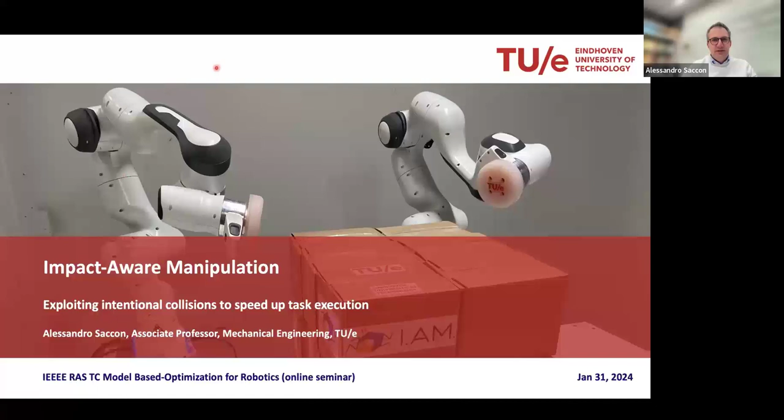Yeah, indeed. So the talk will be on impact-aware manipulation, and we'll tell in a second what I mean with this. Let's see if I can go. Yeah, a bit of introduction.

Where are we, or where am I? So we are in Europe, north of Europe, in the Netherlands, in Eindhoven, which is in the south. You probably heard about Amsterdam, Rotterdam, and this is pretty known. Eindhoven is in the south, and is the hometown of Philips, originally, an international company that you probably heard of. That also started the whole university back like 50 years ago, and then out of this a whole group of companies and also other activities spun out.

So a few companies that you might have heard about are ASML and NXP, and this is all essentially high-tech mechatronic industry. But then there's also quite some automotive activity with trucks and stuff, and also logistics, with a big company, Vanderlande, that is doing, for example, automation in airports, or parcel and warehousing. So we are collaborating with all this area, and the area around here is also called the Brainport. So if you're curious, you can also double check.

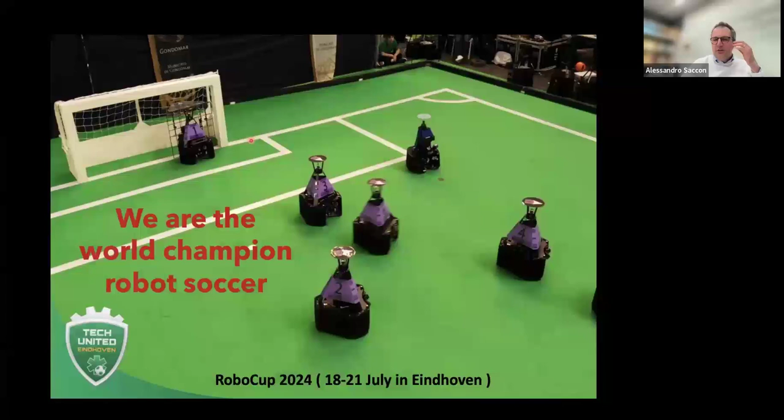So what are we doing here at the TUE in terms of robotics? You probably know that we are also on soccer competition, so we have activities on RoboCup. RoboCup will also be organized here in Eindhoven this year. There's a lot of my colleagues working on multi-robot collaboration and on strategy. How do you make a system also collaborate with humans? There will be, I think, the first match with humans this year.

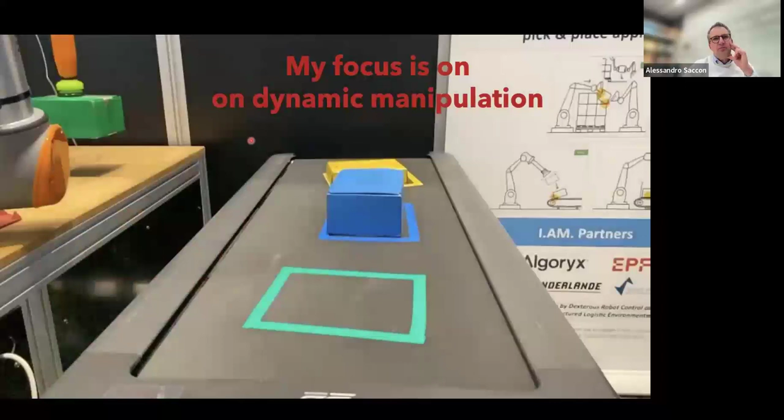But my focus here at the TUE is really on dynamic manipulation, and the idea is how we can actually exploit collisions, intentional collisions, to make things happen faster, or do things that are not otherwise possible, like in this case reaching a certain destination that is out of reach, out of the workspace of the robot. This is a demonstration that we did of the type of technology we are developing for a case of robot tossing, and this idea of speeding up the process. I will say a little bit more later about this.

Let me see if I can click.

Okay, a bit of my journey, a bit of background of myself. I'm actually Italian. I studied in Padua in the northeast of Italy. I'm a computer engineer by background. I did a PhD in system and control. I was actually back then working on virtual motorcycle riding.

There was a company, Ducati Corsa, that was trying to get simulators or lap time simulators to understand how to better predict the behavior. So then I essentially moved from system control and computer engineering background to more mechanics, I would say. And then we had collaboration with companies that are producing things like Adams, a multi-body simulator.

And in this period, I spent quite some time also in the US, about 1 year, mostly working on numerical optimization, nonlinear control, maneuver regulation, path following. And through this journey, I worked a bit in Ducati Corsa in collaboration, developing tools for racing motorcycles. But at a certain point, I said, okay, I actually prefer staying in academia, and then I started going a bit around.

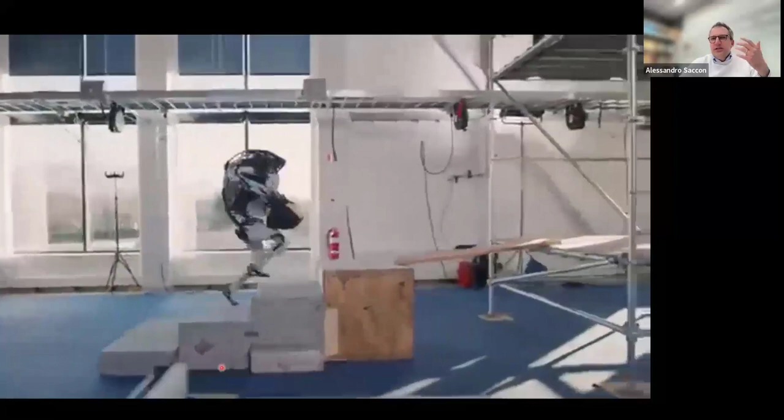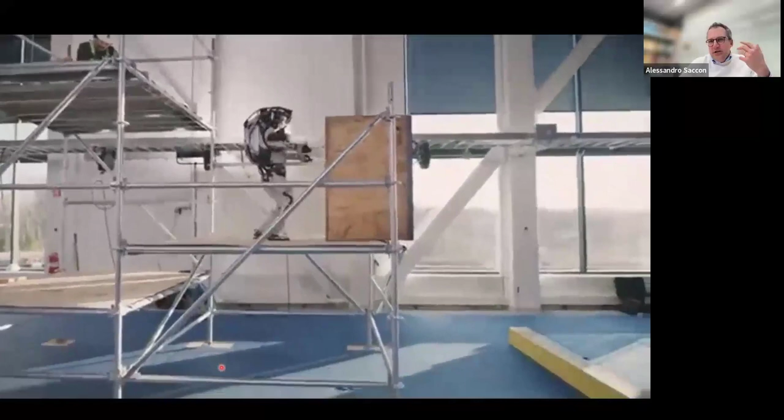And there's a lot of research that has been done on locomotion, both for bipedal and quadrupeds. My interest is looking more at the manipulation part, because there are not only gaits, there are other things that are interesting. So that's the motivation. Hardware is getting ready, and how can we make this a common technology that is available? You can probably see that there's a rise of commercially available dual arm manipulators out there.

So half humanoids, just arms with torso, and also full humanoids. Last year was just incredible, right? For humanoids, you have this Optimus, 4NE-1, a Figure, Phoenix, and way more. And I just put there a few, and you see the different type of robots that are compliant with backdrivable joints, and they are really meant to physically interact with the environment. So there's maybe a little bit of a hype in the expectation that these robots will be able to do everything like we do in a few years. I don't know if that will be true, so we'll see how it will evolve. Anyways, it's a very exciting period in time, where incredible hardware is getting available even at commercial level, not just in research centers. And there's all kind of things happening also for perception to really understand where objects are in the world.

So then the question is how can we perform this action again at regular speeds. But then for me, it's also interesting, okay, how can we speed it up? How can we really bump into things on purpose? And how can we then still make these motions somehow robust? Because you can have a plan, but of course it will never go as expected, especially if you have impacts. So what to do in that case?

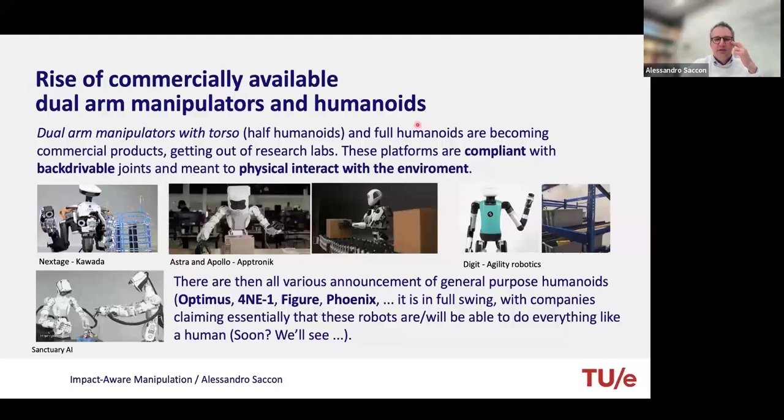Good. So impact-aware robotics - we, like I said, as humans, are capable of dynamically interacting with the environment, with objects, with the ground, with all the walls around us. We do it every day when we run or jump, for locomotion, but also when we grab and toss objects for manipulation. And robots are not yet, but they are definitely catching up, in the sense that people are developing better and better hardware every year.

So then there's essentially this emerging field that is really focused on exploiting contact and also exploiting intentional collision. And so this is what I mean with impact-aware robotics, a term that we sort of coined in the last year. And also there's a special collection, IEEE Transactions on Robotics, with other colleagues in the US and here in Europe. Some papers will come out in the coming months. We had like 40 submissions to this special collection, and we are revising probably 10 papers, or about that number that will make it through.

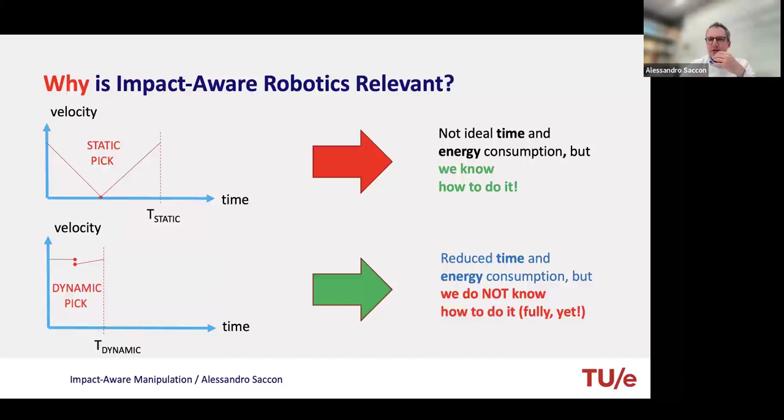This is a simple computation, but the thing is that you don't have to decelerate and accelerate, so this in principle can reduce time. It's true you need the right hardware, so that's something that is still in development. But the other point is, even having the whole hardware, it's not fully clear how to do all those things in a robust way. So this is where we are essentially focusing.

So what are the challenges? So indeed, this is the standard practice, right? Free motion and establishing contact at zero speed. And this is, like I said, a bit limiting and restrictive. And why don't we have the whole, something motion similar to what we do? Well, the point is that you have to rethink many parts in order to be able to do this. From modeling - okay, what kind of models am I going to use for this - from planning, learning.

If you execute certain motion, the learning with impact is different from learning when you assume the transition of zero speed. It's about control and estimation.

So we are essentially missing several things, and there has to be a holistic framework to put it all together. That's the vision I have here, though many other researchers worldwide, with completely different approaches, are also trying to create this type of technology. For me, it's really about showing it on real use cases.

Because of the industry around here, it makes a lot of sense to focus and discuss applications in logistics. But the technology is totally general in principle—it could be applied to all kinds of manipulation, and there's a lot for sure also on locomotion.

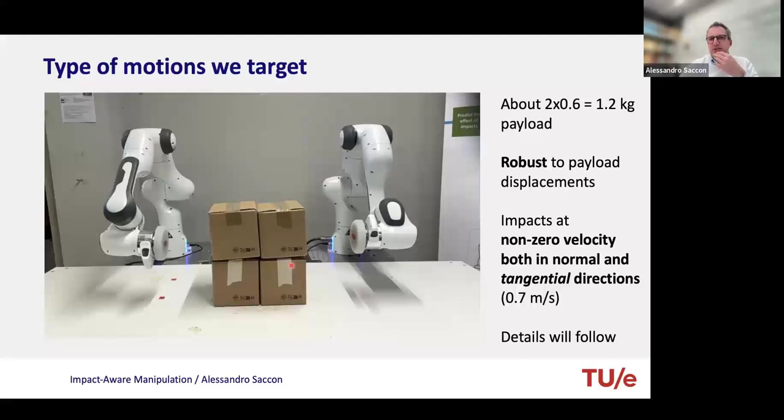I'm going to explain a little bit our way of thinking and the type of research line that we've developed in the last, I would say, 10 years.

So what are the challenges, the missing parts? One thing is relatively important: we are conducting research, but there's plenty of things still to do.

It's really about validating impact models that can predict what happens. If you want to interact dynamically with the environment, you need prior information, for example about the object you're going to lift up. You're not going to lift up a very heavy box without knowing its weight, because the way your body reacts when you lift it really depends on what's inside the box, what the weight is, where the center of mass is, and so on.

So in general, if you have to pick up a lot of objects, maybe the first one you handle carefully—you learn a bit about the dynamics inside, is there something, what is the weight—and then as you learn the objects are always the same, you start getting faster and faster.

This is, by the way, one of the reasons people get injuries, maybe also in logistics centers, because after a while you make assumptions about the weight of objects, but the moment the weight is completely off, you have a real problem—you're prepared to handle an object of a certain mass, but the mass is completely different, and this can create problems, typically on the back.

In any case, we need this type of model in complex scenarios because most impact-aware control is predictive. You should have an idea of what's going to happen, and the controller is built around this feed-forward motion to make sure the control isn't disturbing the natural dynamics of the system. But there's quite a lot still to do on predicting and understanding which models to use, because reality is flexible.

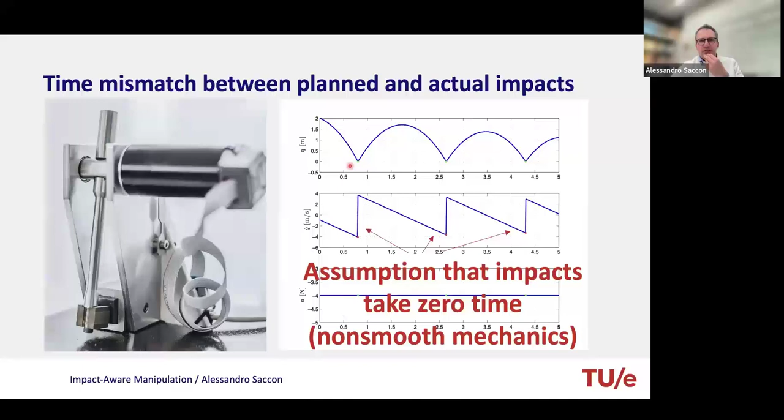But if you are just following the reference given by this blue curve, the reference still needs to have a jump. So the controller is trying again to make the system jump again, right? So you have a really weird behavior like the ones I show here, especially with low gains, where the tracking is extremely poor. Ideally you would like to get something like this: it bounces, and then you start following the new envelope, so on and so forth.

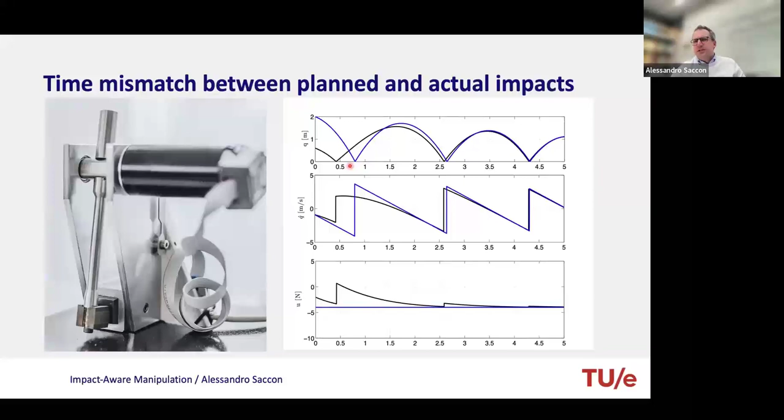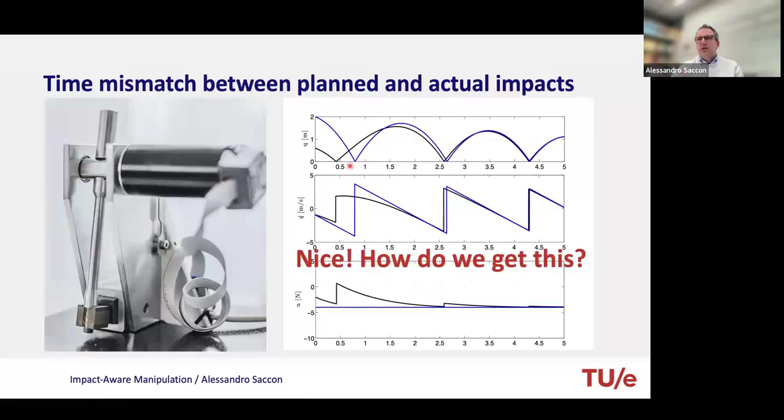This is nice, but how do you get this? Because it's definitely not what you get if you apply a standard tracking controller, which usually is not meant to track trajectories with impacts. So the idea was pretty simple back then, but from this simple idea we proceeded up to the point where we can execute this on a dual arm system and grab boxes with essentially no problem in the last year.

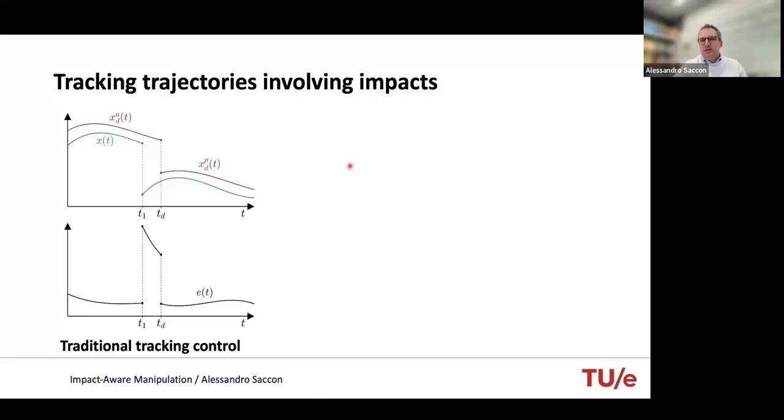And here it shows what the issue is. If you have a reference trajectory, in this case red, and then you have the executed motion, you see that if you take the difference between these two trajectories, you will have this kind of peaking effect, because there is always a time mismatch between the nominal impact time t d and the actual one, t 1.

So the idea we started to pursue is, instead of only having one reference about the nominal impact time, try to have more than one. Like you see in this picture, these things are a little bit extended. How it's extended really depends on the application, but the core idea is that we have more than one reference in a neighborhood of the nominal impact time.

And if you have this notion, then you can define the error based on whether you have experienced the impact or not already. In this case, the error is between these two curves that I'm highlighting, up to the point where an impact is detected. And when an impact is detected, you will start following the other curve and define this as the error, and the result is that you get a completely different type of error definition.

And this simple trick allows you to get this type of behavior that I was showing before, without even changing the gains. So with the same gains and a new error definition, you get this behavior.

So one question is, okay, what do you get, and where are these things coming from? I think it was really coming from the idea of trying to do planning for motions with impacts, and then trying to do sensitivity analysis.

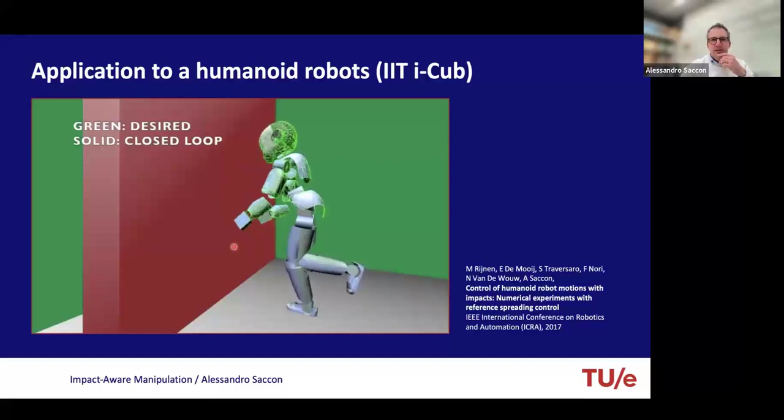And showing that indeed, even if you have a desired motion, in this case green, and the solid one is closed loop, and you start at a different moment, you can really have this convergence even if you have this mismatch. And this was also employing a QP controller for doing the balancing of the robot. So we showed a few years back that this idea could be relatively easily applied to real humanoids and systems.

So then the thesis of my former student finished in 2018, where all these kinds of things are described. And then a few years after that, we got funded from the European Union to continue. So that also involved other colleagues, Aude Billard, Abderrahmane Kheddar, Sami Haddadin, as academics. You probably know them all well.

And some companies active in logistics. And then the company Franka Emika, now Franka Robotics, of course, and then Algoryx, a company doing physics simulation in Sweden, in particular making sure to simulate complex simulations. The project will end in March of this year.

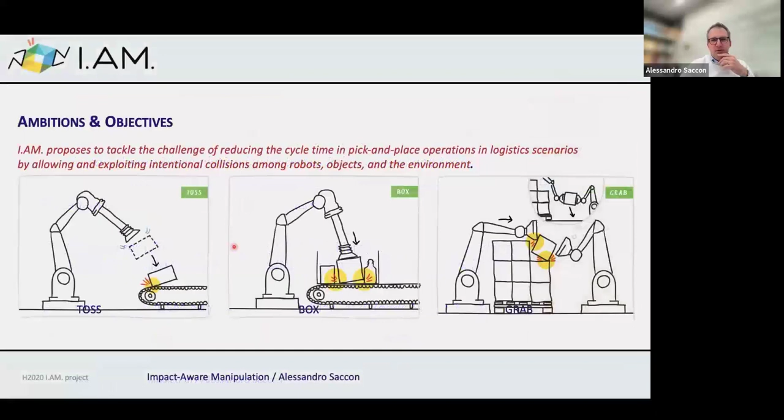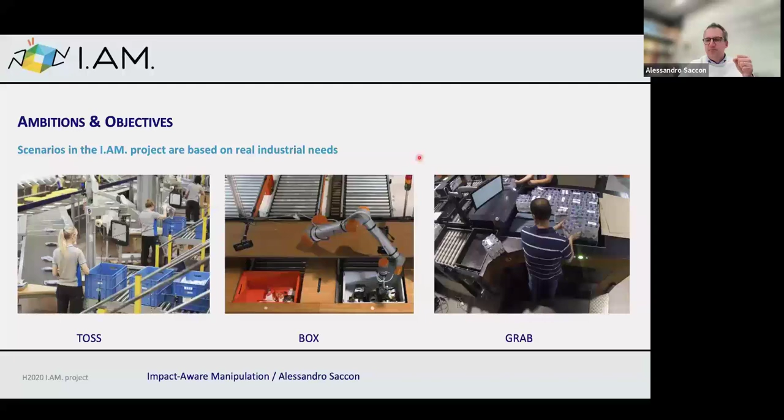And in the project, we are focused on tossing, boxing, and grabbing scenarios, all things that come from real logistics use cases. So people want to speed up this in-feed process, taking objects and putting them on a conveyor. People want to have bin-to-bin motions where you use contact and impacts to speed up the filling and also the filling rate of the totes. And the grabbing scenario is more a dual arm manipulation where you do the palletization.

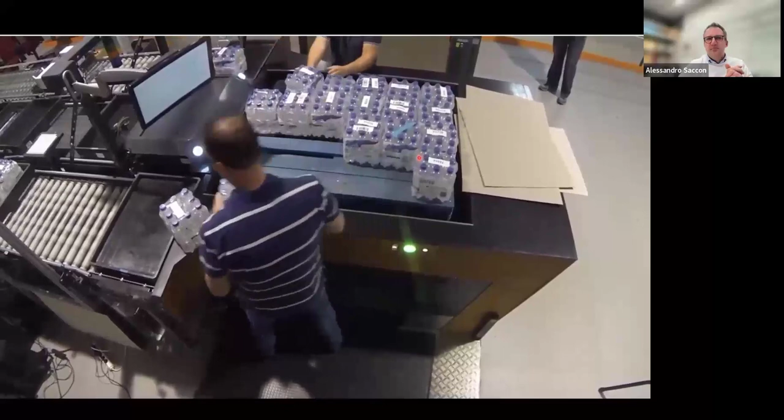We have a lab here where we test especially the first two use cases. I'm not going to discuss this much today for the sake of time, but I will focus more on this dual arm manipulation part. And just the things that we are doing here at TU/e, because the other partners that I mentioned are also doing fantastic work there. So you can check the publications on the website on what they are doing. I'm just representing what we do at TU/e.

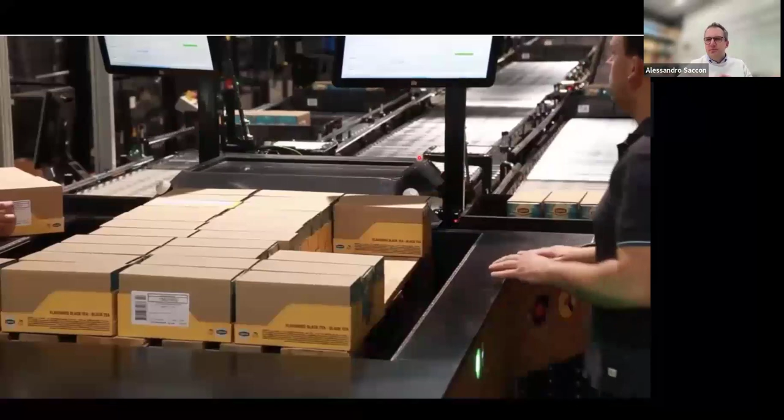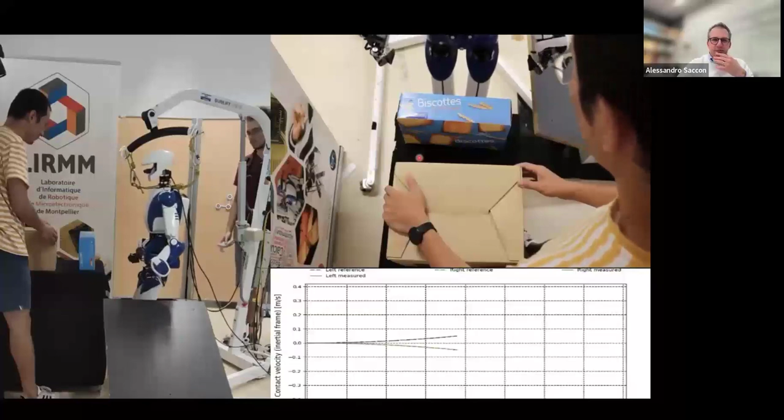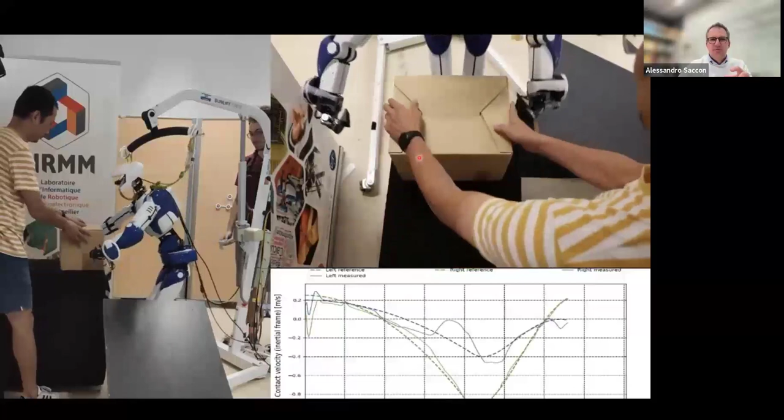This is an example of the type of motion I was telling you about, where people grab and put objects, dual arm grabbing, and you see that the operators will pick up more than one object at the same time, or will make it slide. This is the type of motion we would like to automate. And the group in Montpellier was trying to put their type of control strategy with the QP, also to show a humanoid performing the same motion. This is not really using the things that I'm going to discuss, but it's still interesting to see robots performing this type of motion.

And here at TU/e, I will just show this. There was Automatica, showing this idea, if the animation works, just to show that we can perform even with the dual arm system fairly complicated and interesting motions. And this will be in this case just contact-rich manipulation.

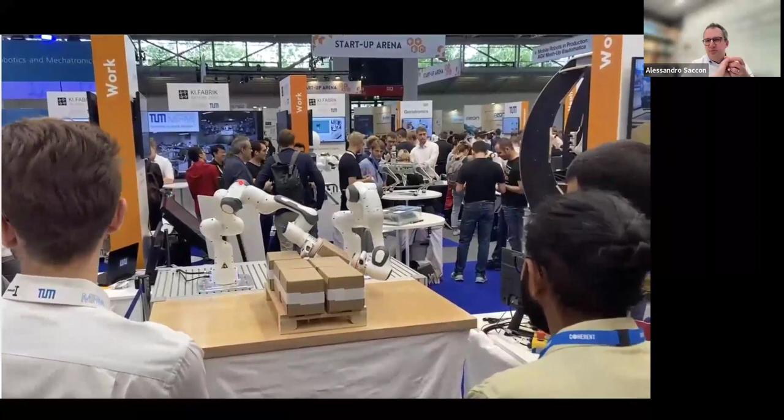But the part that is interesting for this talk is not really this manipulation part. It is really one of the last parts, where you will see that after placing a few boxes on top of each other, you can actually do some flipping and rotating, and then the question is how would you stabilize in general this type of motion. And of course, the reference here is teleoperated. That should not be a surprise for most of you. But the question is, once you have this type of motion, how do you make them robust, how do you stabilize them. And this is what I'm going to discuss in the remaining 15 minutes.

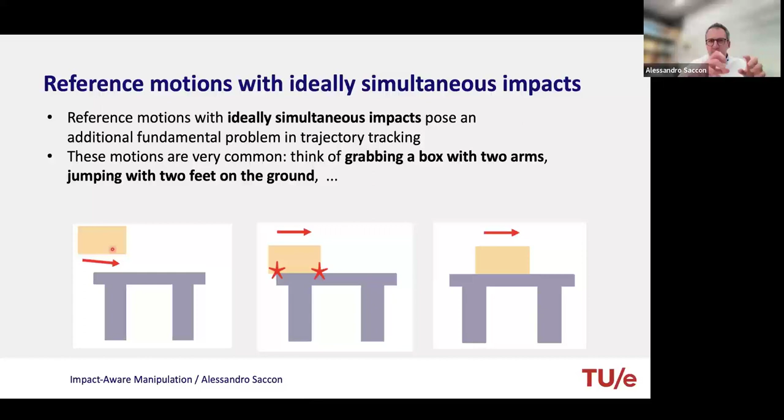So one of the interesting things is that if you want, for example, to have a robot make a box slide on the table very quickly, this is a sort of surface contact. Ideally you think the box will just touch with all corners on the table at the same time and start sliding, so there's only one impact, right? And this type of motion is a bit everywhere, dual arm grabbing. Your intention is always to do this, but this will essentially never happen in practice. So you can have this target, but you want to make sure that even if you have misalignment and therefore a series of spurious impacts, the dynamics is still stabilized.

And the problem is that once you have these spurious impacts, in this case one impact is the nominal one in the simulation, and the other one is the spurious one where you have an initial condition that is not as you wanted, you can have really sudden changes, for example, in the angular velocity. So think about holding a box and making it slide on a table. The reference will say the angular speed of the box is 0 before and should be 0 afterwards. But with these spurious impacts, suddenly the angular velocity can become extremely large.

And the thing is that the dynamics of the system will naturally try to push it back to that level. So if you just use an impedance controller with high gains, this is actually problematic, because you are trying to reduce that speed, but the angular velocity is actually helping to do the stabilization. Okay.

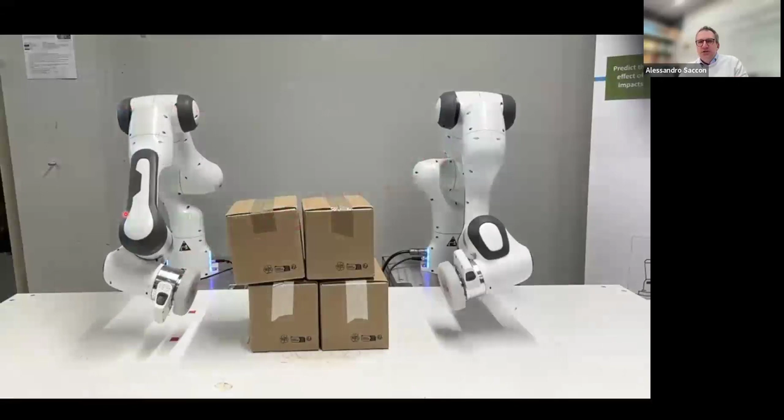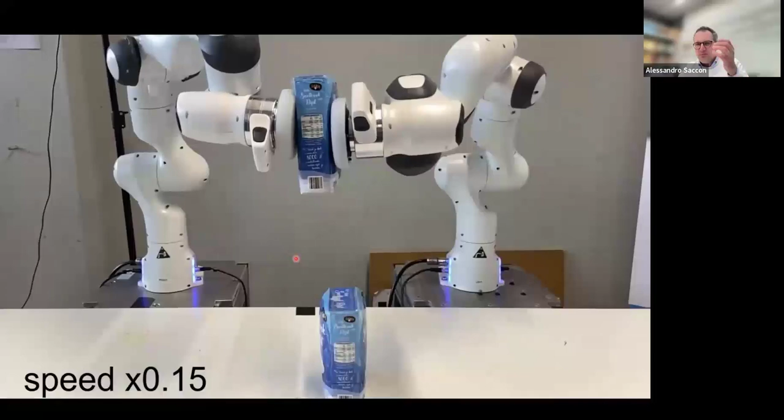So as long as you do not disturb the system in this phase, then essentially you will be able to continue the execution. So that's what we did, and we are demonstrating now on this type of motion that I show you, and the details are in some of the papers that we published, and one paper that is also under review in Transactions on Robotics now, where we also show different type of objects. And here I show you boxes, and in this case a pack of rice. This is about 0.708 meter per second, about a 1 kilo box.

But once you then record the motion of the real robot, then we can essentially create this extension, as I was mentioning before. This is for the position and the velocity and also for the force. And then we have essentially a way to track that motion of the real robot now with high gains without having this issue that I was showing at the beginning when trying to apply a standard trajectory tracking controller. So if you want to have more details, it's really in this paper; there's an online version already available.

But the message here, and I'm just looking at time now, is that we show that by having this new form of controller with this interim mode, which is this proposed approach, essentially we go through this type of impacts you saw, even if you have a mismatch, so you still have impacts before and after, without commanding any big jump in the velocity that you would have, for example, if you would not use this type of strategy with reference spreading, or if you would use the reference spreading approach where you just change the controller only once after an impact occurred.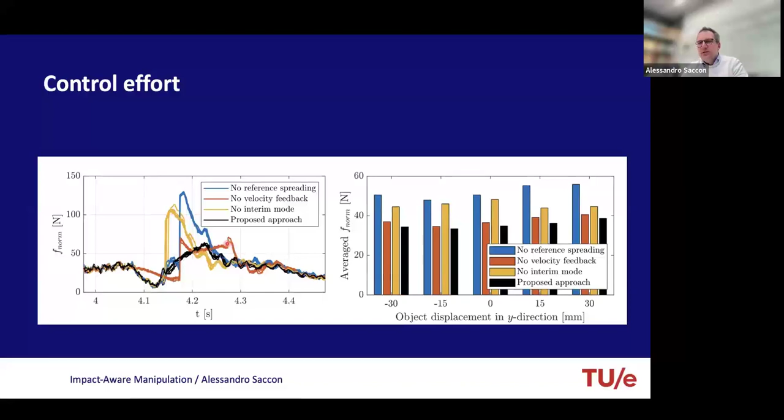We also compare with another approach, which is also sometimes, I think, used in practice: essentially removing the velocity feedback. And we saw that indeed removing the velocity feedback before and after the expected impact is a possibility. But at the same time, we found it extremely not robust, at least for manipulation purposes. So this is the typical plot, and again, I don't have the time to go into the details, so I encourage you to read the paper for more details.

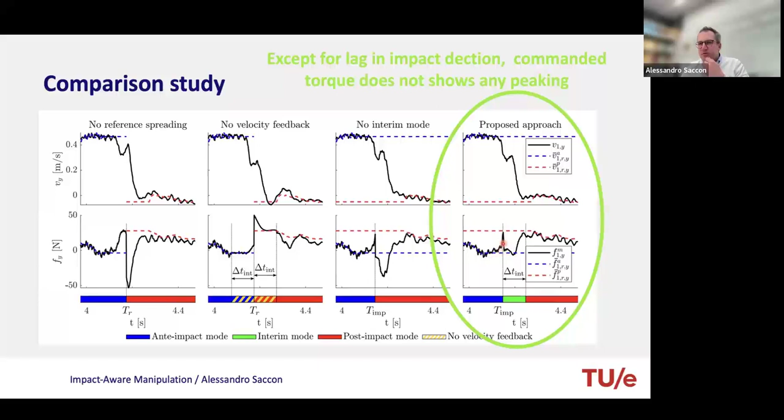But essentially, we saw that in the proposed approach, except for the fact that you have an impact detection phase, where indeed there's a sudden change in the velocity of the system with respect to the reference. Therefore, you have sort of a small spike in the force that you command because there's a large error building up. But after detection of the impact, essentially we have a particular intermediate phase where velocity feedback is disabled, but we still have feedback, and we then transition from the pre-impact trajectory to the post-impact trajectory.

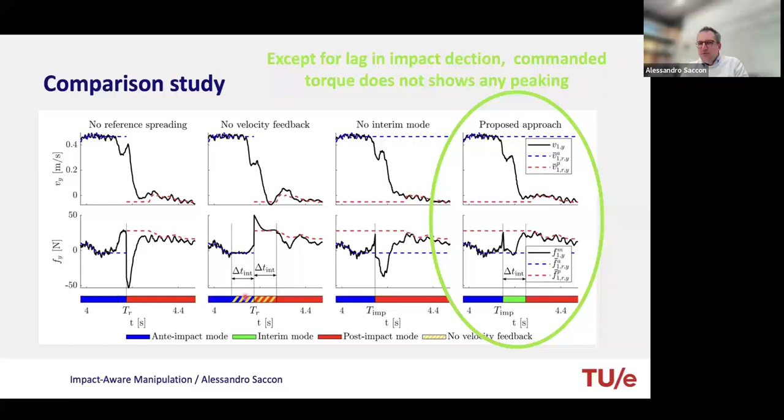And this phase is of limited extent, for example, with respect to one where you would just disable the feedback before and after, without having any triggering. So essentially, in our experience, we can clearly see that there is an advantage of using the strategy we're proposing. We are curious, of course, to interact with other researchers to see their experience in trying to implement the same strategy. But this is more or less what I wanted to say, at least in terms of trajectory tracking.

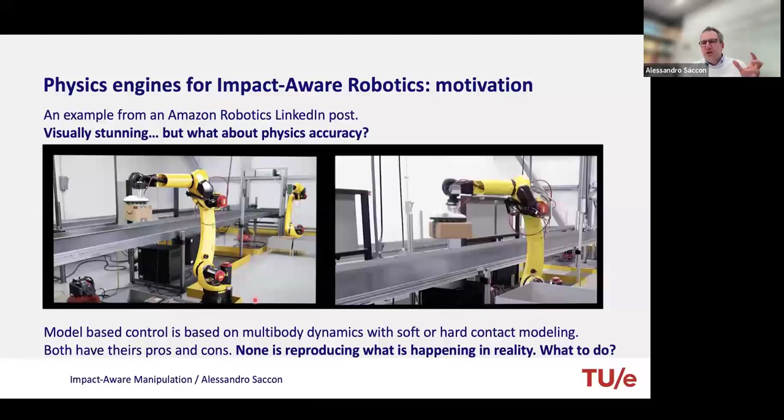And I want to finish the talk here mentioning a bit what we are exploring with post-impact velocity prediction. This is an example from an Amazon Robotics LinkedIn post, which is showing what people sometimes call a virtual replica or digital twin, right? This idea that you have a real robot and one done with computer graphics. They're clearly visually stunning, but when you look at physics interaction and simulation, it's really impossible to reproduce all kinds of oscillations that are happening, plus all kinds of things with the friction and the soft interaction. So the question is, how can we combine the two? What should we use, especially for predicting the behavior of the system?

So we started in 2017 working, in this case a work that I've done with Padois, where we took, for example, this lightweight robot arm from KUKA, right? And we essentially just smashed it against, impacted, a planar vertical surface, and we tried to see: can we still use rigid body models and get an idea where the system velocity will jump depending on the impact configuration and the ante-impact speed? Can we predict the post-impact speed somehow?

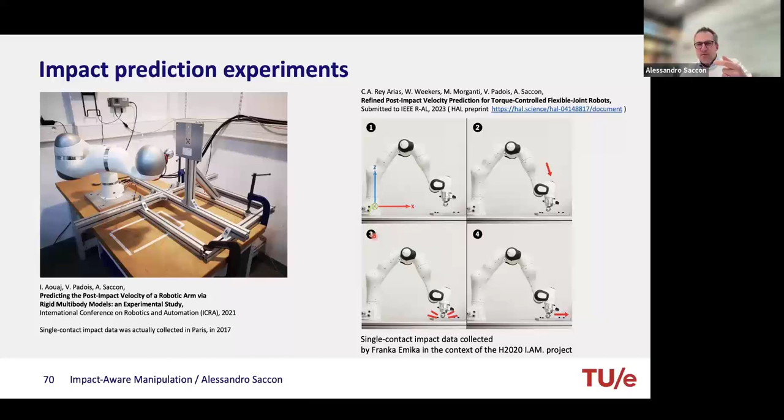We did it with the KUKA paper. We have a paper now under second review at Robotics and Automation Letters with the Franka robots to do similar things with further results. Also, we discovered that we can include certain effects of the motor dynamics and the low-level torque controller to get a good estimation. But what I want to mention in general is that this is a typical way that we think about this problem.

Model A is a robot that has a flexible joint and flexible contact, and you can go to a model where you still have the flexible joint, but the contact becomes non-smooth. So it's just an impact law type of thing, a non-smooth model. And you can further reduce it, where you essentially consider that the transmission between the motor and the joints is rigid, and the contact is also rigid. So this is just a simulation example.

It shows you that essentially these vibrations induced by the softness of the contact and the oscillation due to the link are somehow higher-order dynamics with respect to the rigid robot, that is, model C, as long as you have the right inertia in model C. So this is typically what will happen, and I will show you in a second on another slide where you see these models. We are getting confirmation that we can still use rigid robot models as long as we know the right inertia to place on the links.

And in one of our latest papers we show that it's also important to know the low-level joint torque gain that you have on the actuators to do so. But if you do so, then you have a fairly good idea where the system will jump, and you can use this information to create, for example, references to generate motion plans. Because one thing is, you can do demonstration and record this jump. You get it from motion. This is something that we have been doing.

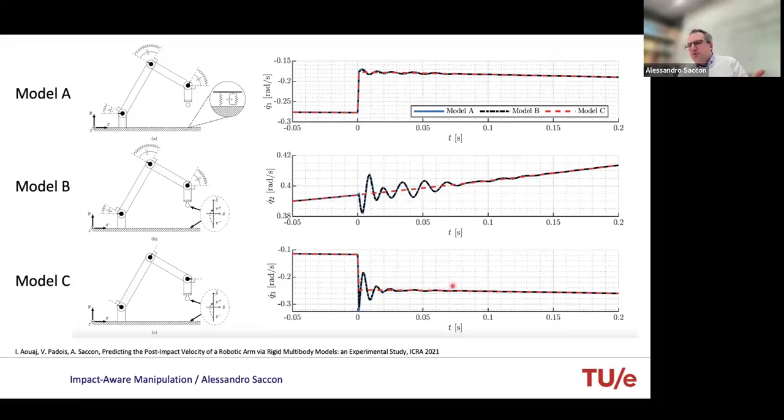But the vision here is to use fully model-based models to be able to pick up boxes and things, assuming we know the inertia of the boxes, and have these analytical models validated with experiments, where what we care about is really figuring out this gross jump, so that we can generate post-impact velocity references afterwards and then stabilize them.

And here's an example of what we get on real experiments, for example, on this Franka robotics arm. Essentially this is a position, the black one, and then we show that once the robot impacts, we will have all this oscillation in the velocity, typically from the flexibility of the motor. The oscillation will depend on the particular configuration and the particular type of surface you're impacting. And you can estimate this light blue line offline after you look at the data.

And we are showing that you can, in this way, compute sort of an equivalent post-impact speed of the rigid robot. And we are able to show that we can actually compute this point analytically from an equivalent rigid robot model. So that's what we are doing at the moment.

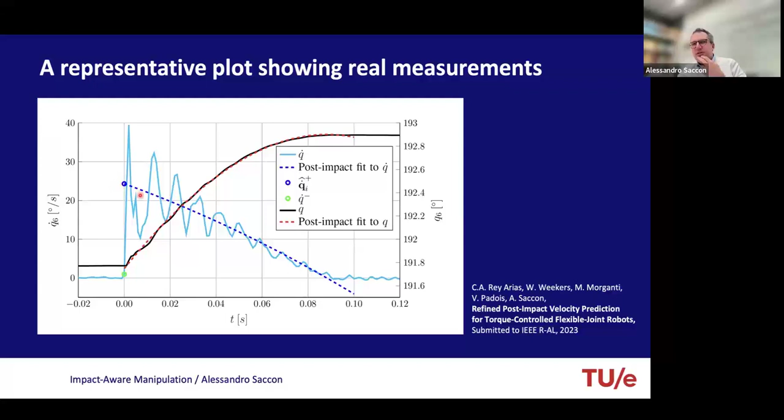And we are getting sort of confirmation that, if you have the right inertia, which is more detailed in the paper, you can say, okay, if this was the before impact and this is the post-impact velocity, as long as you compensate correctly for the inertia, you can get pretty decent estimation of what the system will look like. So meaning that you could trust this kind of impact models to then generate plans. And then I showed you very briefly, we can have ways of stabilizing this type of motions.

I see that I have a few minutes, and then probably there's a few questions coming. So I just want to mention very briefly that we are also expanding this idea with vector fields, or dynamical systems, if you're familiar with the work of Aude Billard, where the idea is that we have vector fields before and after impact, and we match these vector fields based on the impact dynamics. So we can actually do all these things, not just with trajectory tracking, but also in this context.

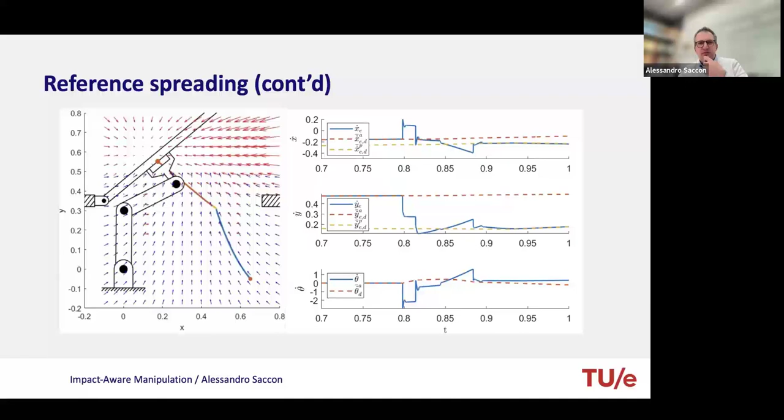And this is now a completely time-invariant strategy, but still having these benefits of respecting the dynamics and, even at high gains, not really putting a lot of requests to the end effectors. Lots of plots, but that's not important here. So you can get this type of behavior that is robust: even if the planning has been done assuming that the box was there, even if the box is tilted and rotated, because of this robustness from reference spreading, you can still achieve this motion robustly.

And we are now in the process of also showing that this can be implemented on real robots. We don't expect big issues, but still it's interesting to showcase. And then, here I want to skip this part. It's not essential for the time being.

Okay, with this, I want to conclude with the topics that I did not cover. We also look at the impact-aware collision monitor. We'll discuss this more at ICRA in Japan; we'll be there to present this type of research. We've also done work with a group in Munich, and we are saving this data in a whole database at TU/e, to make it available for other researchers that are interested in validating impact models. Everybody is welcome to contact us. If you have experimental data with robots, we are happy to include this type of data for the community later on.

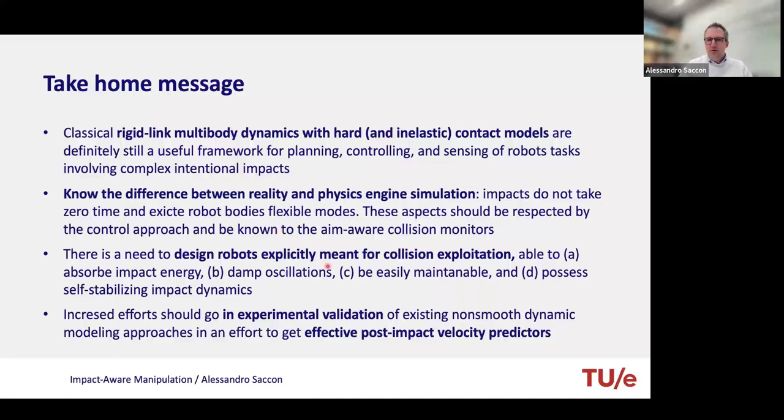And indeed, also increase the effort in experimental validation, really to show that we have indeed this whole approach is effective, and you can have really effective post-impact velocity predictors that are essential for being able to have very good planners. I want to thank you all for your attention, and if there are questions, I'm happy to take them.